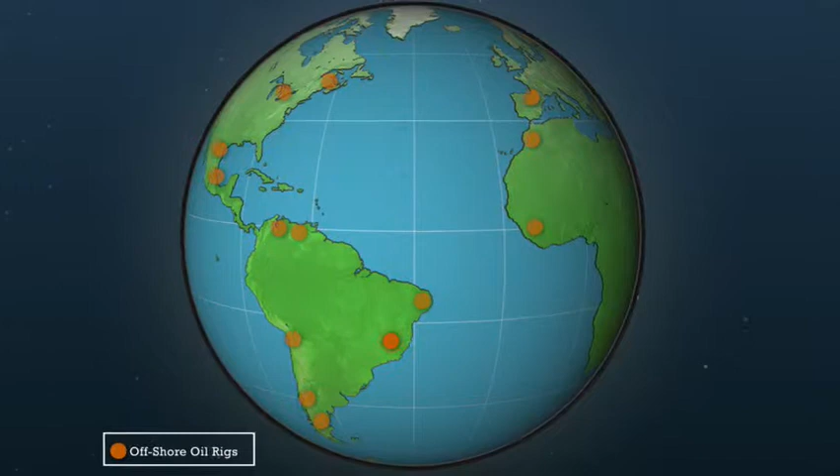In nearly every area of heavy industry, corrosion and wear are phenomena of paramount concern. In the pursuit to locate and produce greater quantities of oil and gas each year, energy companies are forced to operate farther away from the shore and in deeper waters.

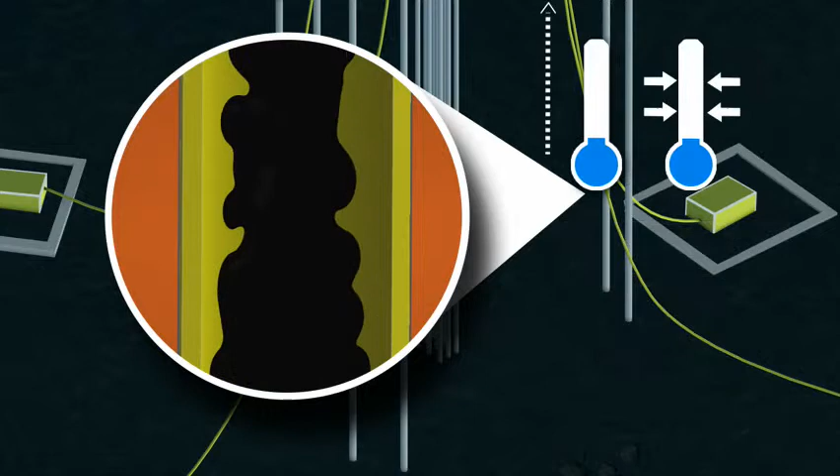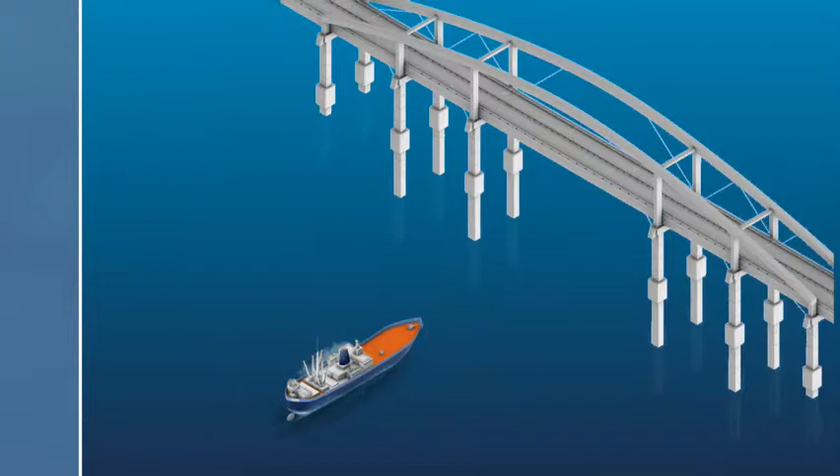This remote drilling involves extracting and transporting abrasive, caustic fluids at high temperature and pressure. The extreme stress placed on pipelines and processing equipment, coupled with near unimaginable costs for repair, has caused the industry worldwide to redefine their standards for long-term corrosion and wear protection.

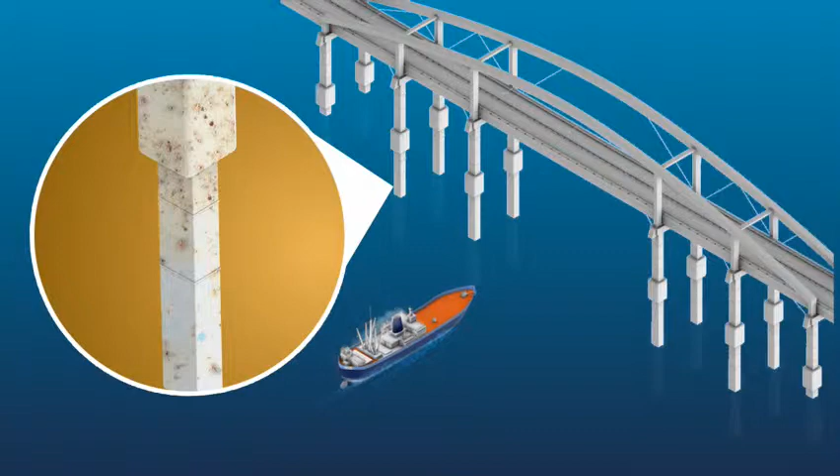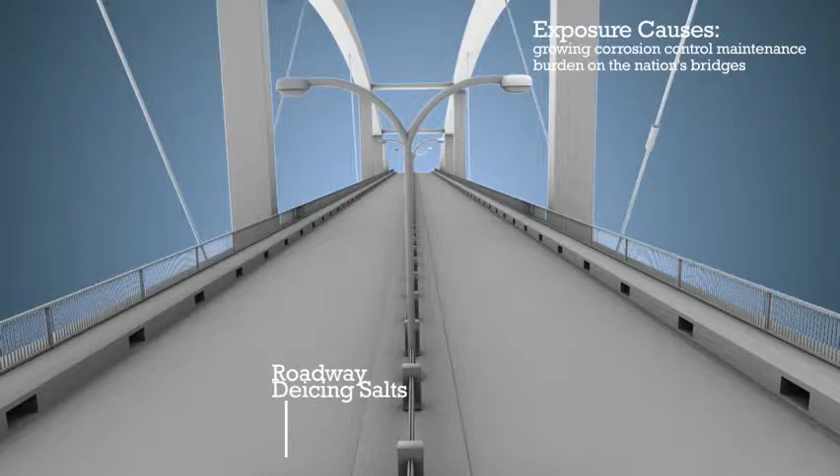The U.S. Federal Highway Administration estimates almost 200,000 bridges, or 1 of every 3 bridges in the U.S., is structurally deficient or functionally obsolete. Corrosion from exposure to harsh environments, such as saltwater and roadway de-icing salts, is the primary cause. As a response, nearly every state has adopted the policy of best maintenance, where considerable research and development is underway to identify the next generation of protective solutions.

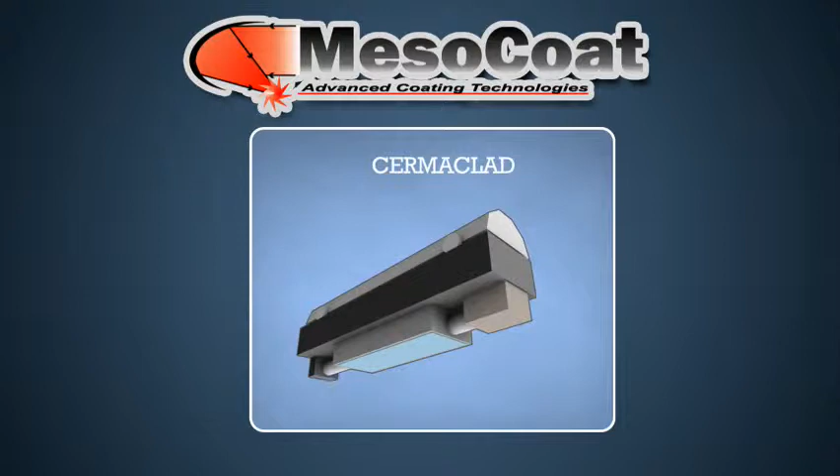Abakan Inc. has the right to acquire 75% of MesoCoat Inc., a solution provider for metal wear and corrosion protection. MesoCoat has developed a revolutionary high-energy density fusion cladding process, Cermaclad, that provides exceptional levels of wear and corrosion resistance for large area applications such as gas and oil pipelines, chemical storage and process equipment, tankers and bridge structures at a fraction of the cost of competing solutions.

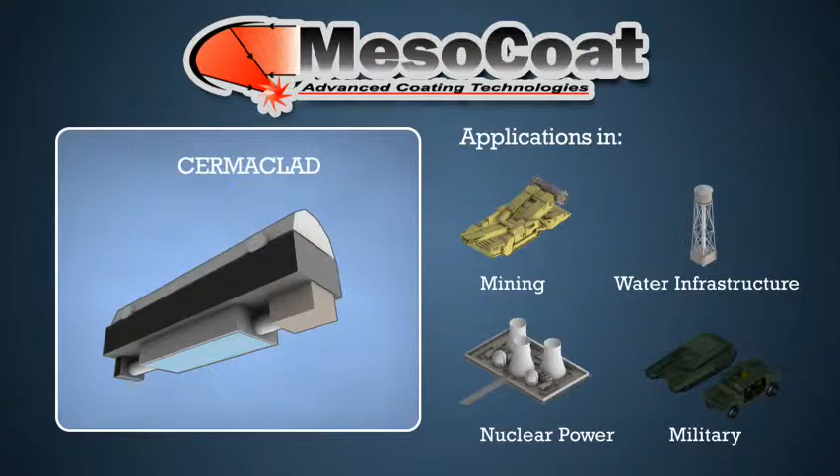This technology has applications in numerous other large markets such as mining, water infrastructure, nuclear power, and military, among others. Cermaclad shows the promise to surpass the corrosion and wear standards of all current coating and cladding processes.

Wear and corrosion costs an estimated $1.2 trillion annually worldwide in early replacement, lost production, poor performance, damage to metal structures, vessels, and machinery. The combined clad pipe and clad plate markets, in which steel plates and tubes are clad with corrosion-resistant alloys, is worth $3.8 billion worldwide and $1.5 billion in the U.S.

According to experts, a better alternative that can reduce the life cycle cost of final products would double the market size for metal cladding over the next 3 years to $3 billion in the U.S.

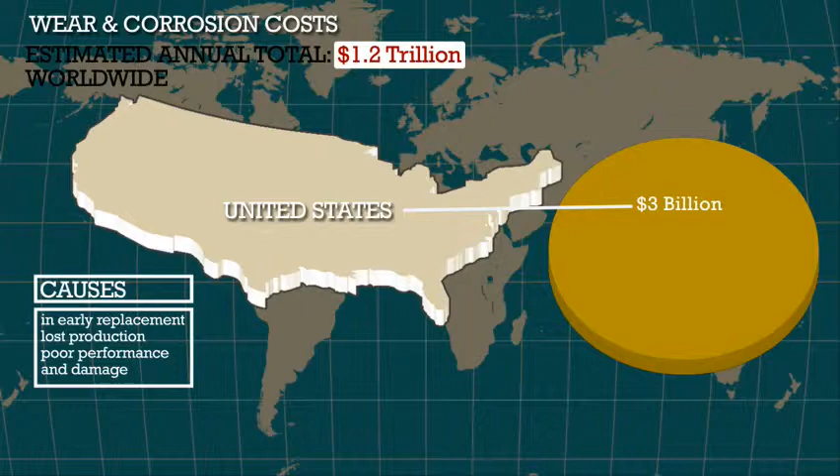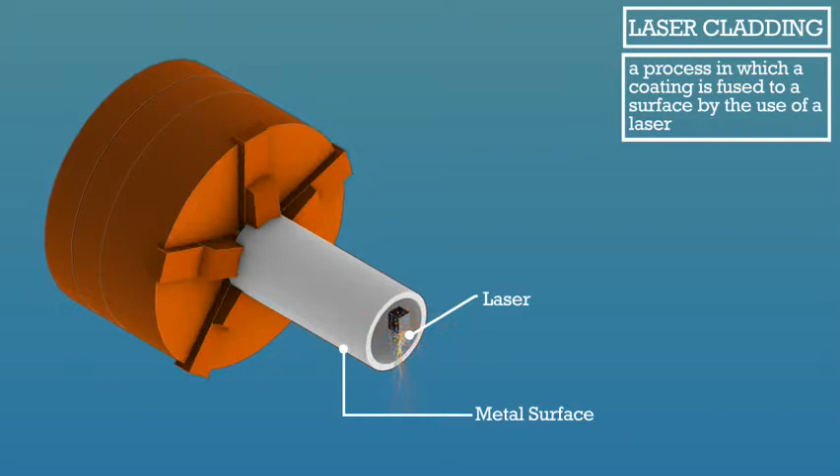Today, the most common solution to mitigate extremely corrosive elements is a process known as laser cladding, where a coating is fused to a surface by the use of a laser. This process is expensive and time-consuming. In the case of pipelines, it creates multi-year lead times for purchasing pipeline, as the laser cladding can't match the line speed of the steel mills.

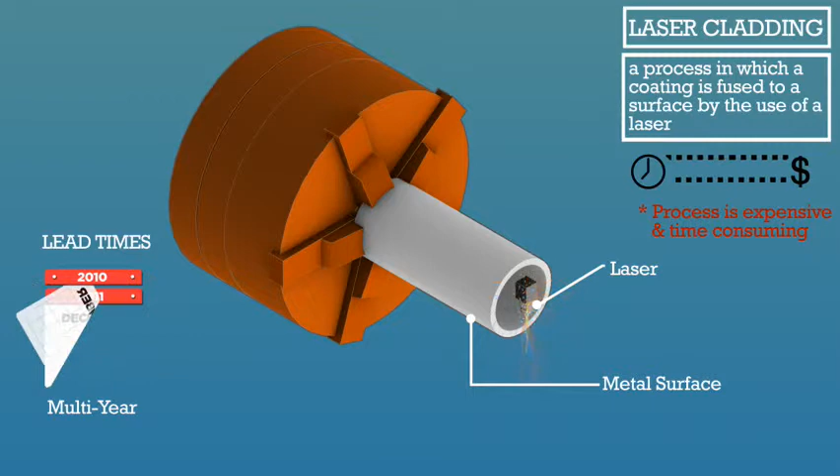There is a multi-billion-dollar market opportunity for providing pipeline companies with a cladding solution that is cost-competitive and can reduce lead time and provides better performance in the ongoing battle against corrosion.

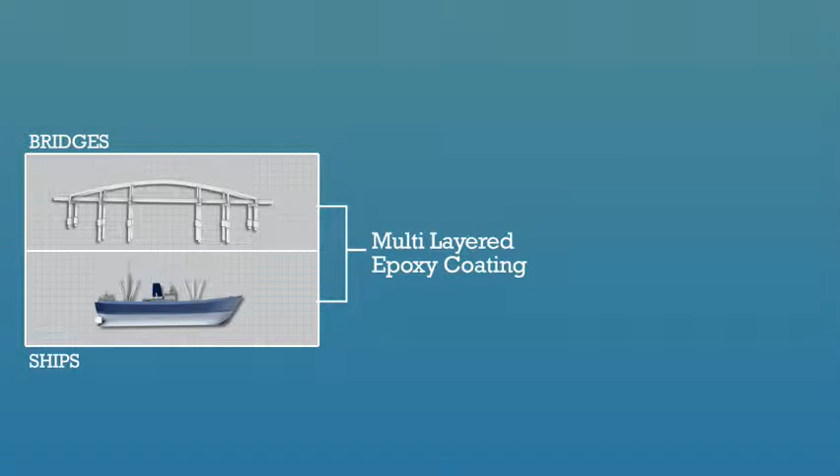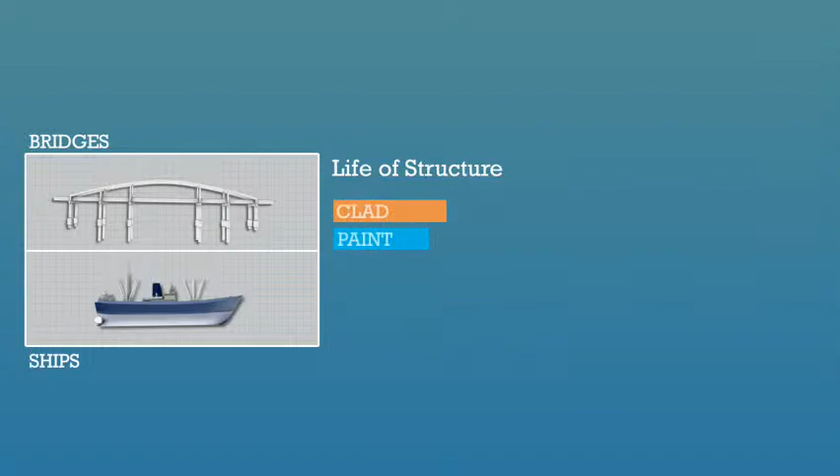For bridges and ships, wear and corrosion are currently combated using multi-layered epoxy coatings. Each year, the federal government and state departments of transportation spend billions of dollars on bridge rehabilitation and maintenance due to corrosion. The useful life of these structures and vessels would be extended significantly if they could be clad rather than painted. However, the existing cladding methods are too time-consuming and expensive.

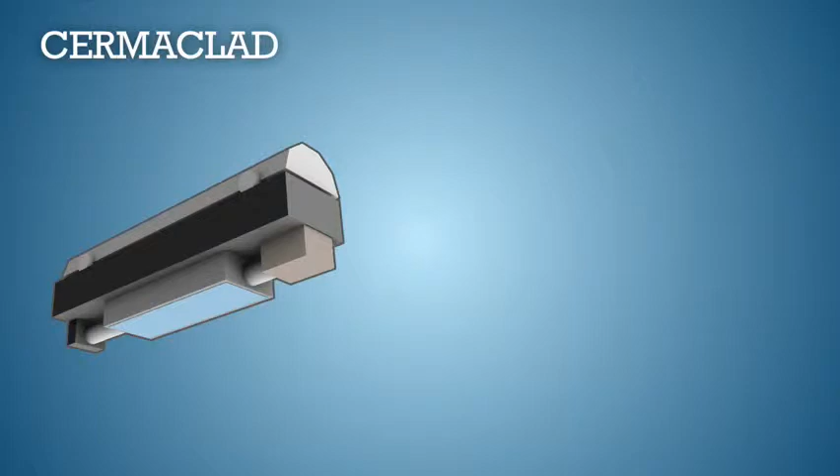Cermaclad has the potential to allow users to obtain the benefits of cladding with a corrosion-resistant alloy at a cost comparable to applying an epoxy coating. This opens up tremendous opportunities in the oil and gas, infrastructure, and marine industries.

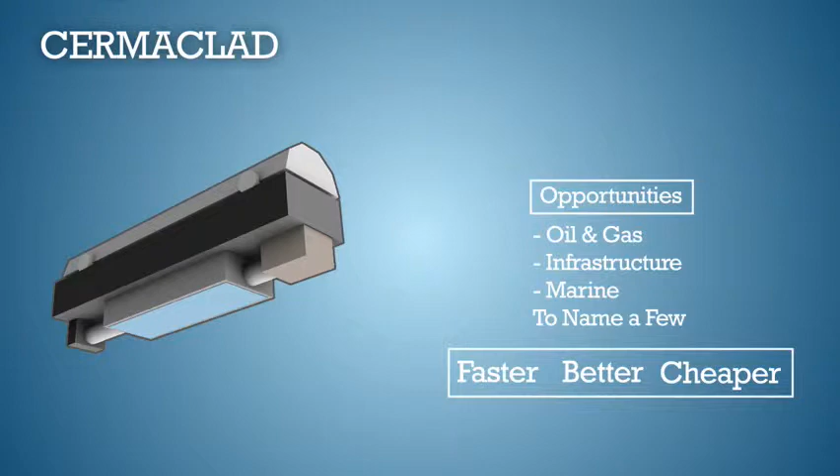Cermaclad offers the promise of faster, better, and cheaper cladding for large area applications. Here's why. Faster: the Cermaclad process has a 15 to 75 times wider application area as compared with the narrow focal point application area for laser cladding. A single laser head fuses a track of 0.7 centimeters per pass, whereas the Cermaclad system fuses a track of 12 to 60 centimeters in one pass.

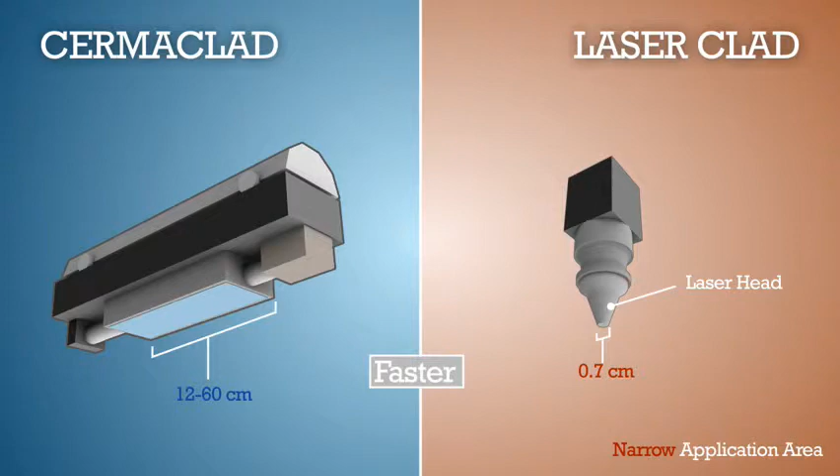This would allow a single Cermaclad system to coat 28 miles of pipe in a year versus 2 miles for a single laser cladding system.

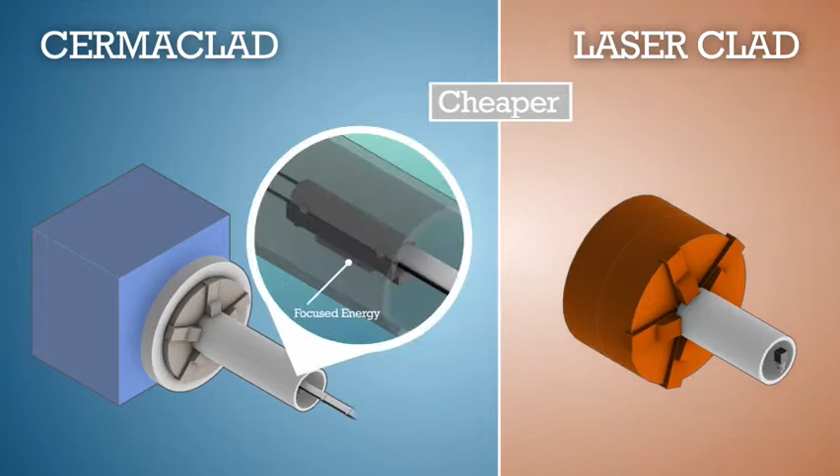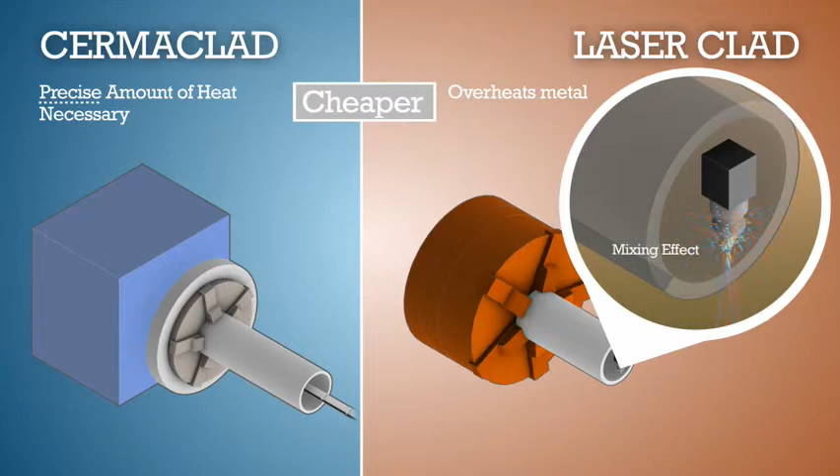Cheaper: the Cermaclad system offers focused energy that delivers the precise amount of heat necessary to bond cladding materials to metal surfaces. Laser cladding, on the other hand, overheats the substrate metal, creating a mixing effect, which requires that a thicker layer of coating be applied.

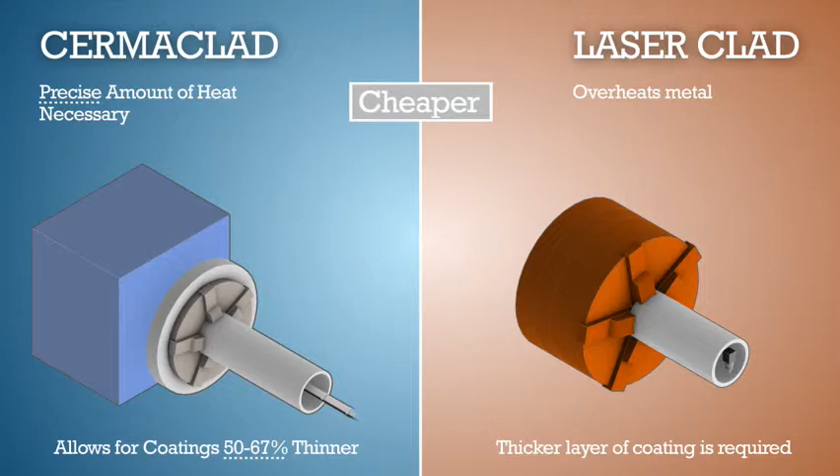The elimination of this effect should allow for the use of coatings that are 50 to 67% thinner as compared with laser-clad coatings that have the equivalent or improved performance compared to currently used technologies. This should bring the cost of expensive alloy coatings such as alloy 625 and 825 down substantially.

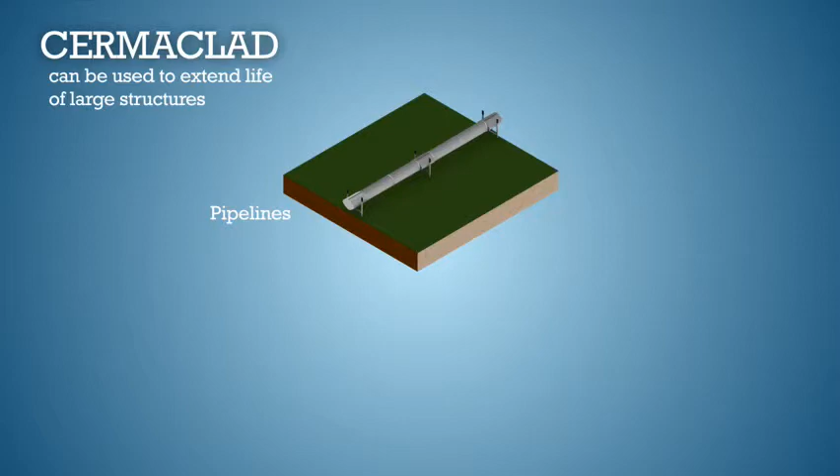Better: the Cermaclad system can be used to extend the useful life of large structures such as pipelines, ships, rail cars, chemical plants, and bridges by cladding them in a protective, corrosion-resistant metal. This would afford substantially better protection than epoxy paints, which are commonly utilized today.

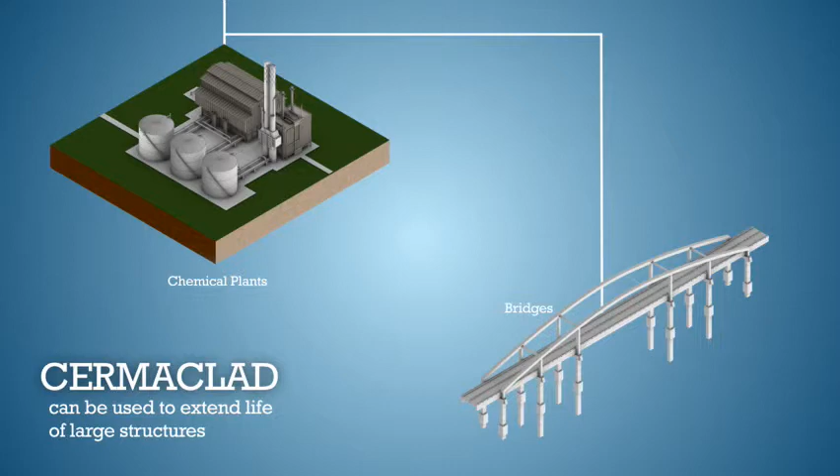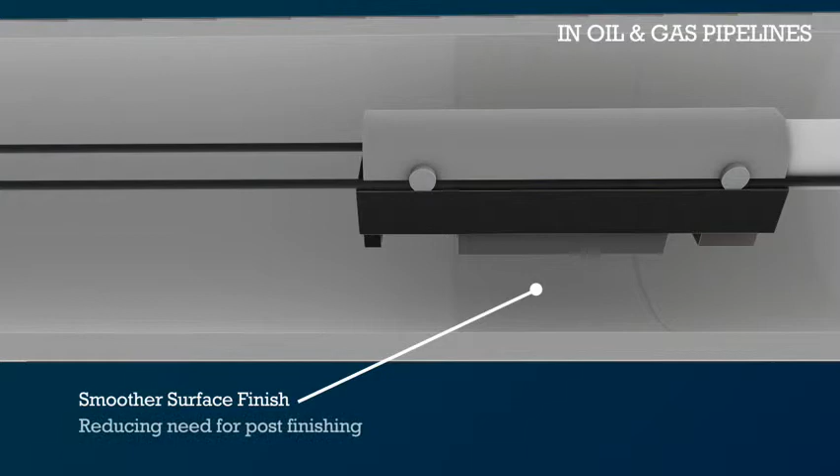When used to coat oil and gas pipelines, this wide application area results in a smoother surface finish, which reduces or eliminates the need for post-finishing, resulting in additional savings. The smoother coating should also lead to longer term operational cost savings for the pipeline operators by reducing the cost required for compressing the oil and gas.

With its investment in Mesocoat, Abakan is ushering in a new paradigm in the corrosion prevention world.